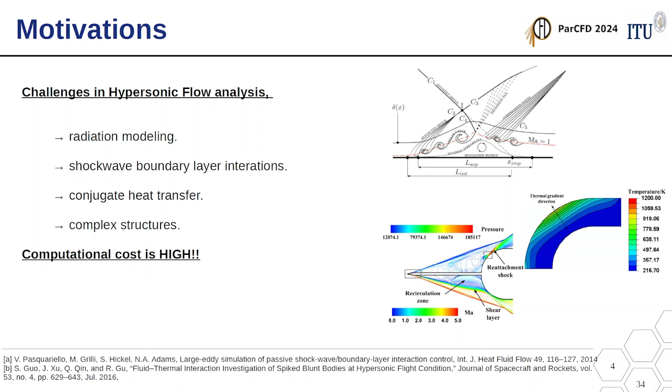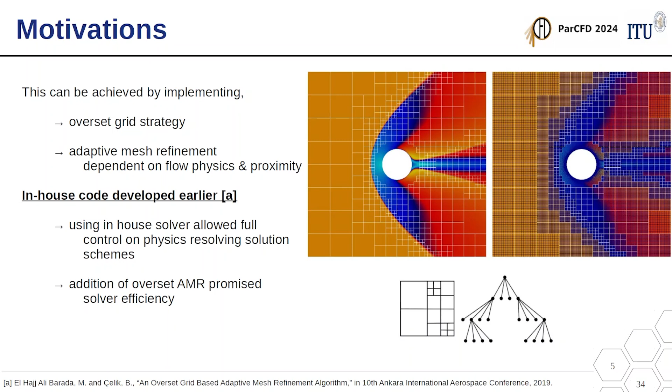As a result, you can already imagine that the computational cost is going to be rather high. So we would like to search for some strategies to reduce this cost. Some of those strategies are the overset grid implementation or using adaptive mesh refinement. So indeed, those are the strategies that we try to follow, and we try to develop our in-house solver. This solver we actually presented in a conference in Ankara, the International Aerospace Conference.

Unfortunately, however, this code had some limitations. It was limited to serial computation, and it was limited to 2D cases. Additionally, and most important, it was limited to a single tree as a basis for our AMR, which is very memory restrictive. So as a result, we recently were considering expanding the horizon to solve those problems.

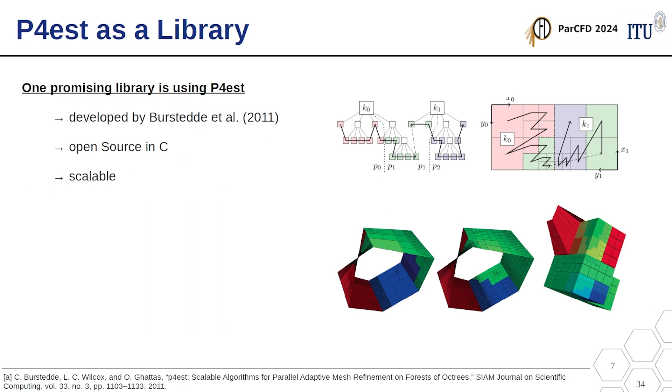We discussed at length and we found out that using an integratable open source library that provides a parallel scalable multi-tree structure is going to be the most suitable for us. Indeed, we actually found one, which is p4est. It's an open source library written in C developed by Burstedde in 2011. It's very scalable, and it has been used in multiple flow problems.

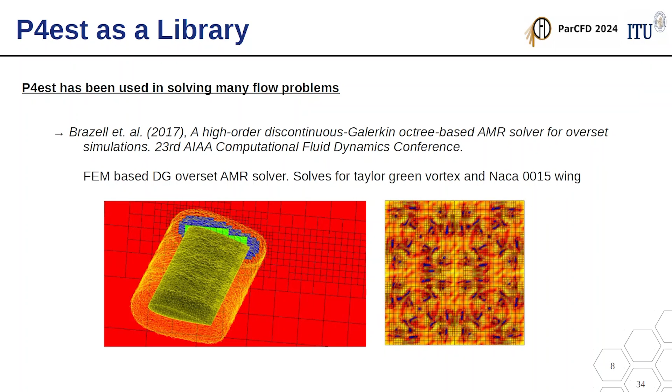For example, in 2017, Brazell actually worked on the Taylor green vortex and the NACA 0015 wing, and achieved very nice results on a parallel environment. Also, Pan et al. in 2011 worked on a finite volume-based solver with p4est integration for incompressible viscous flow, and it provided very nice results.

So how does p4est actually work? It's based on the Z-Morton curve, a space filling curve that fills the space, and it's cut into multiple partitions for parallel solution. The manipulation of p4est, which is essentially a forest of octrees, is done by using some functions which have callback functions provided by the user. Some of those are p4est iterate, refine, coarsen, partition, and balance. Partitioning is also done in real time.

p4est hasn't really been used in literature, to our knowledge, within the context of overset AMR for a finite volume based supersonic flow solver. However, this general idea of overset and AMR has been done in literature. For example, Kenway et al. worked on an implicit strategy for overset grid assembly, which is also parallel. Peron et al. used single octree overset AMR with interpolation for different levels, but didn't talk about the parallelism approach.

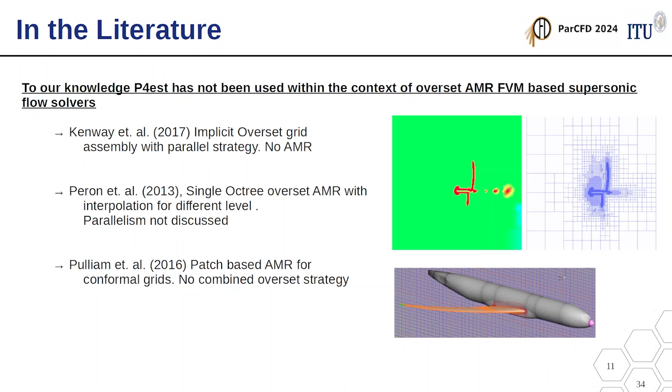Pulliam also worked on an AMR strategy for conformal grids; however, he didn't talk about the overset strategy. So in this study, what I plan to discuss from our results is that we're going to assess the integration of p4est within an overset AMR-based supersonic/hypersonic solver in terms of solver accuracy and parallel performance.

Also, as a side note, since we're dealing with overset grids, we're going to talk about the conformal grid. The conformal grid is going to be inputted from OpenFOAM tools, primarily blockMesh. So the implementation of p4est into our code is rather simple. There are three junctions where we implemented it: the overset grid assembly, the AMR process, and finally the partitioning and parallel communication. In overset assembly, we essentially use p4est as the foundation for our Cartesian grid.

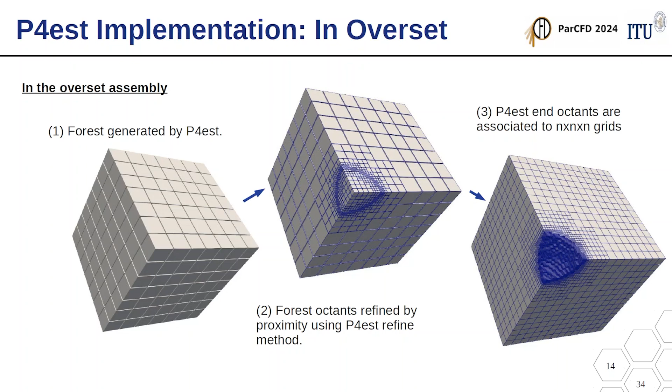So from there we generate a forest, which is a collection of octant nodes for multiple trees. Then we refine it based on proximity. Then finally, for each octant, we generate an associated grid. For example, in this case, as you can see in the figure, it's a 2x2x2. Then from there we do the assembly process.

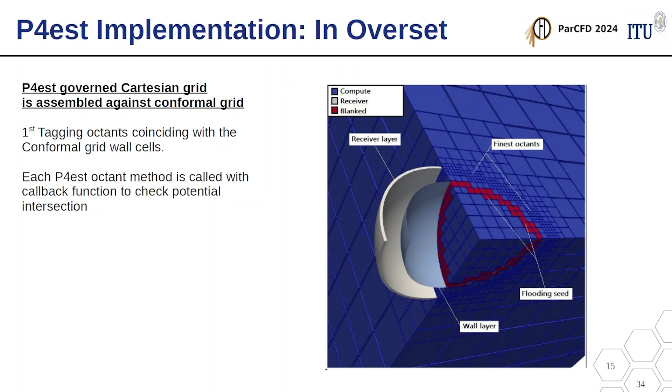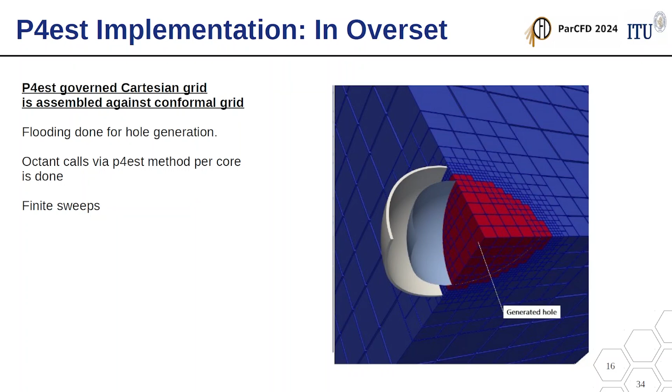By using the conformal grid wall cells, we tag the octants that are intersecting with them. Then from there we essentially create a hollow. Then we choose a flooding seed from the inside, and we fill it to generate the hole. This is done in parallel, where each core that has its octants runs a specified number of sweeps to generate the flood and fill the hole. Finally, the outermost layer of the hole is used as receiver octants.

As for AMR, we also use p4est. Simply, we call the p4est manipulation functions, for example refine, coarsen, and balance, and to each of those we provide a callback function. Those callback functions are essentially an assessment of whether the octant requires refinement or coarsening.

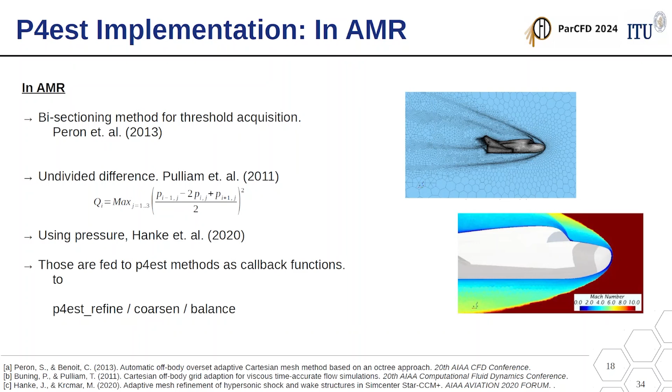For our AMR techniques, we use the bisection method for threshold acquisition. This has been used by Peron in 2013. We also use the undivided difference for the sensor function, which has successfully been used by Pulliam. And as the value for the threshold, we use pressure, which has seen very successful results for capturing regions of interest, for example shock waves, as you can see on the right by Hanke et al. in 2020.

Moving forward, there is, however, one problem with p4est, mainly with the coarsening. If you do coarsening, sometimes it does not obey the balance rule, where you have a one-level restricted refinement difference between adjacent octants. To remedy this, we coarsen, then rebalance. However, to ensure that we do not lose the data from coarsening and then re-refining from the balancing, we temporarily cache it, then re-provide it. If the octant is permanently coarsened, then we delete that data.

In terms of partitioning, p4est also helps us. The conformal grid we partition using the OpenFOAM tool, since we also use it to generate the mesh. For the Cartesian grid, using p4est partition, we partition it to the cores that we're using. We also apply a rule that children octants of the same parent are on the same core. That allows us to do coarsening without having to communicate between cores.

In terms of communication, there are three communication classes. The first one is conformal to conformal, within the conformal grid. This is done using the classical approach via MPI, where we communicate the ghost cells. Cartesian to Cartesian we communicate using the p4est MPI implementation. Finally, for communication between the conformal and the Cartesian grid, which is necessary for interpolation, we use a broadcast approach.

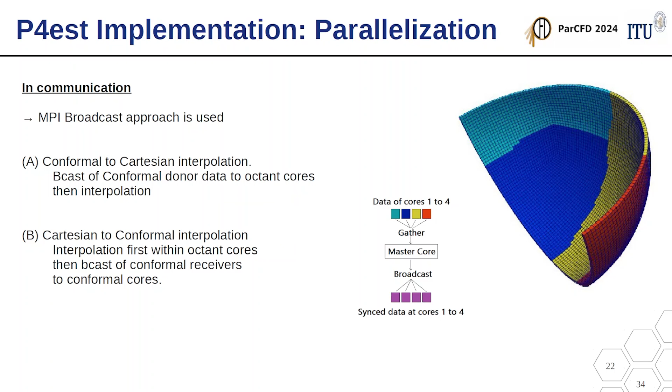In the broadcast approach, the donor cells and the receiver cells of the conformal grid are communicated from the ecosystem of the conformal grid to the Cartesian grid, in other words, p4est. Then the interpolation process is done. Then the information is sent back again by broadcast for synchronization. So this is how we implemented p4est.

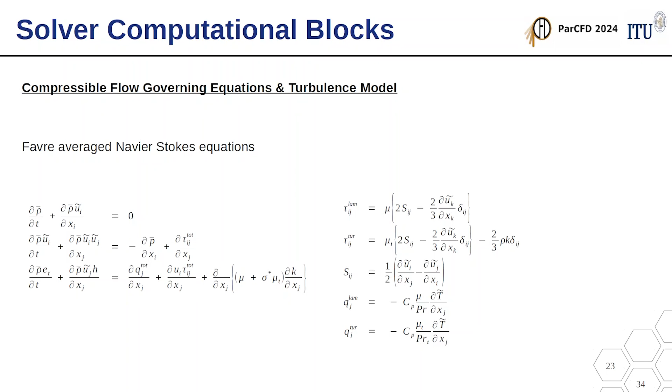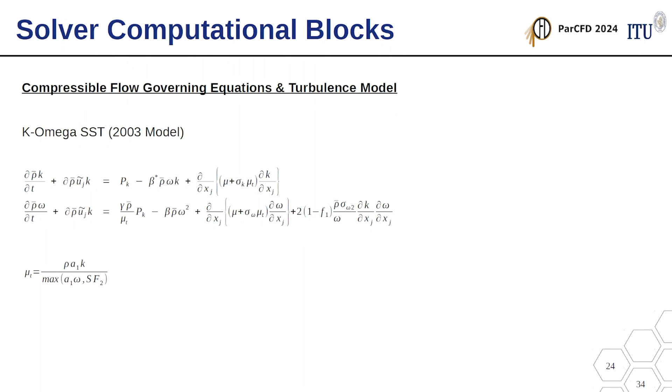Now for our solver, just to talk a little bit about it, it solves the Favre-averaged Navier-Stokes equations, so it allows us to apply a turbulence model. The turbulence model we are using is k-omega SST, as it has been proven able to solve adverse pressure gradient types of problems.

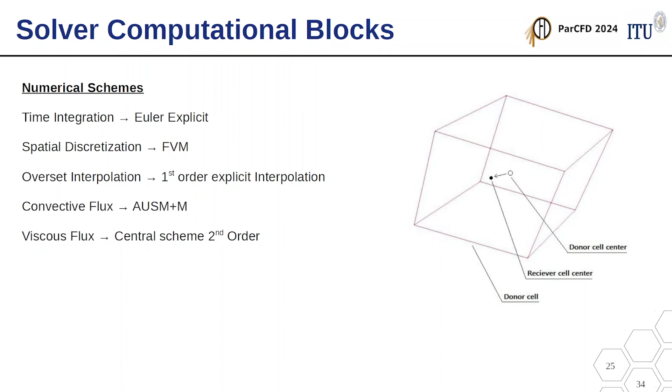We use the following numerical schemes in our solver: for time integration, Euler explicit; spatial discretization, finite volume method. For the overset interpolation, we're using first-order explicit interpolation; convective flux, AUSM+M; and for viscous fluxes, we're using a second-order central scheme.

Now moving forward to the assessment of our integrated solver with P4est. First, let's talk about the accuracy. To assess it, we attack a benchmark problem, the supersonic flow over a hemisphere. In this case, it's Mach 2. The Reynolds number is 1.3 million. We're using a cluster with 12 cores, Intel Xeon Gold 6130.

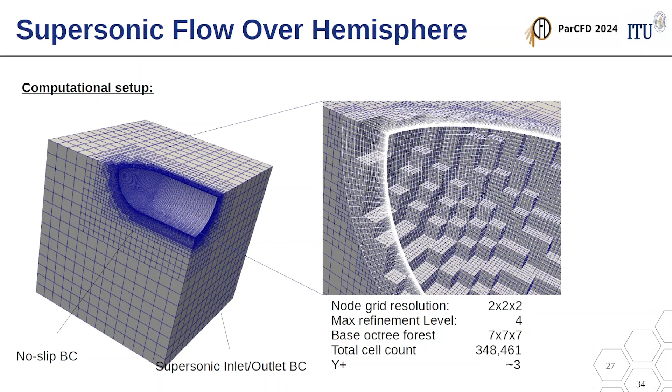The node grid resolution is 2 by 2 by 2. The max refinement level is 4. The base octree forest is 7 by 7 by 7. And we have a starting total cell count of 348,461 with a Y plus of 3 to resolve the viscous sublayer. After running the case, we also ran it with a single grid for benchmarking.

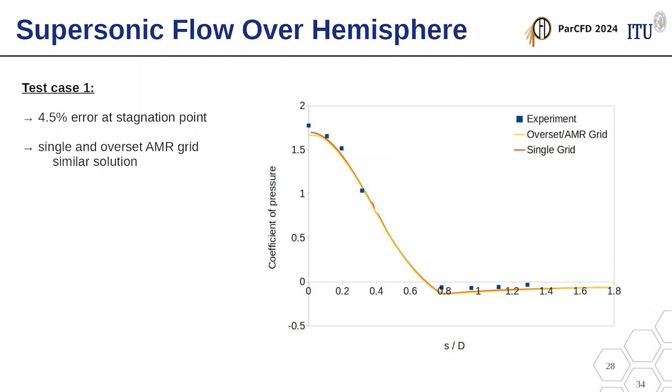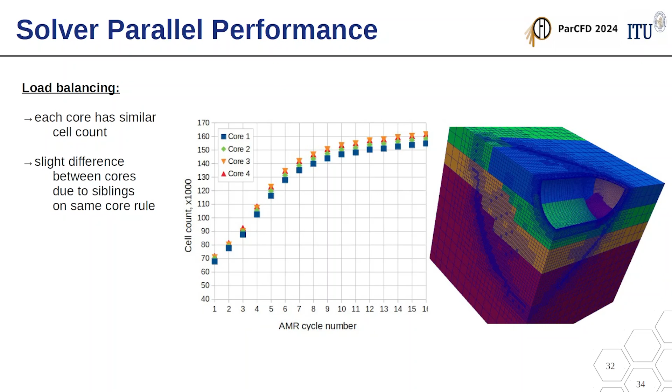Finally, to wrap it up, what were we able to achieve? We were able to achieve promising results in terms of accuracy for our solver, and we were able to prove some good scalability compared to OpenFOAM in terms of strong scaling. Of course, there was lower performance. However, there are some limitations that we would like to address in future studies. Those primarily have to do with the conformal grid generation. Right now, we're using OpenFOAM's blockMesh tool, which is somewhat restrictive to simpler models.

As you've seen, our benchmark is somewhat simple, but we would like to attack much more complex issues. Also, our interpolation scheme is kind of low order, so it doesn't really maintain the solver order. In order to do that, we would like to explore higher order flexible methods for interpolation, for example, inverse distance or explicit Lagrangian.

Finally, we would like to consider a more combined dynamic partitioning strategy, because right now our communication is being done by broadcast. We would like to use methods that exploit the spatial location of conformal and background grids in such a way that it reduces the communication overhead between cores. This is pretty much all about my study.